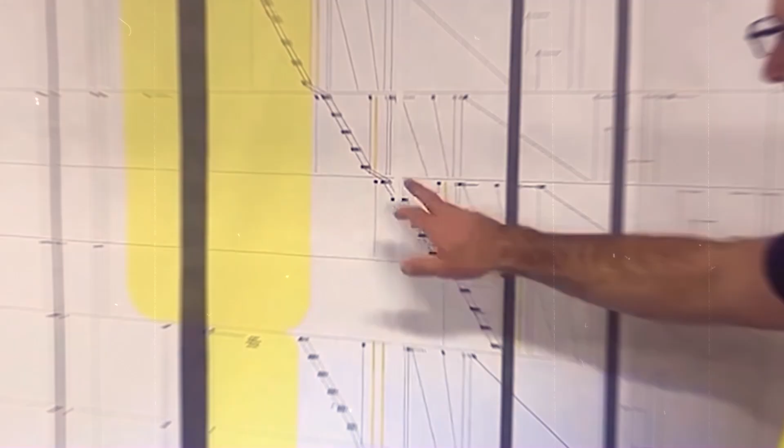Okay, trade partners, I want to just welcome everybody out to our pull plan. If you do a pull plan with other people, you'll see that the way I do it is different. I found this to be very, very effective.

I want you to know that my focus is to protect trade partners. Most contractors don't understand that you cannot beat up trade partners, bully them, force them, push them around, have them losing money, ask them to be all over hell all at once, and still make money. You cannot do that and still finish your project on time, because the project might be the most important thing financially, but that project isn't going anywhere unless the trade partners are flowing and making money.

So I want you to know that these pull plans, the way I do them, are 100% focused on how do we get trade flow and make sure that everyone is taken care of. So this board right here is pre-formatted. We have sticky colors all ready to go. Over here to the left, I've got a little conditions of satisfaction section, and we're going to go over that in a second and ask, what do we need to accomplish as a part of this pull plan?

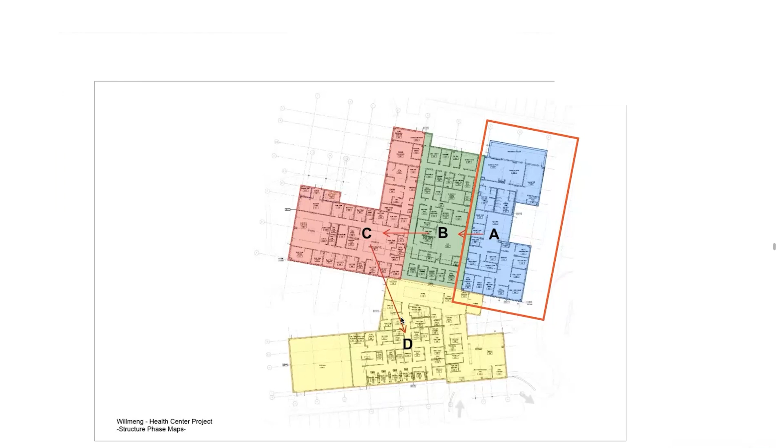We're going to go through our rules, meaning how we want to run the pull plan, or the team does. I loosely say I, but the team already has a proposed zoning strategy that we're going to discuss here in just a minute. And we have our pull plan area. And what's different from what you may have done with other contractors is that this one has different zones.

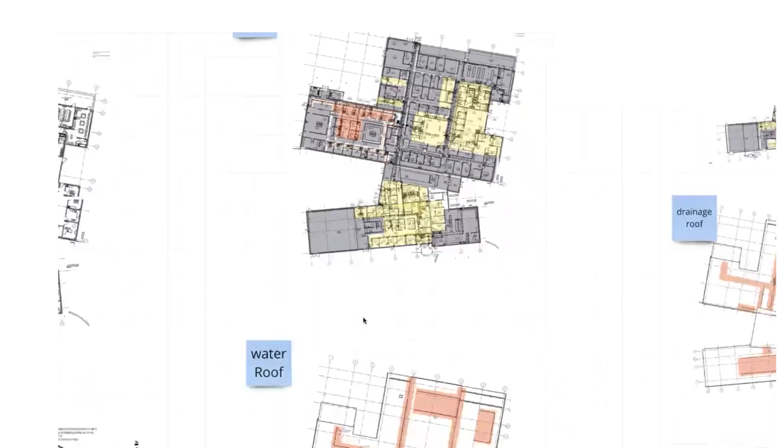The only other thing that we've started doing with Matt's expertise, Matt and Tracy, is that we have already looked at the work density of each of these areas. So HVAC, piping, the HVAC on the roof, electrical. And so we generally know where things are. And that was taken into consideration when we proposed the zoning, but we can definitely adjust that while we're here.

We are going to run it forward. So that means that we are going to only ask you here in a minute, hey, what is your duration and what are your activities? Okay. And then when we go back, we're going to ask you, hey, for you to do that activity, what things do you need? So this is a pull plan where we'll go forward and then we'll run it back to confirm the sequence.

The last planner system means that you all are the last people in the planning cycle, and I would say the most important. What that means is we are not screwing anybody into a schedule that they didn't agree to. We are asking you all along the way. So let's get started. Conditions of satisfaction. This is the first thing we do in a pull plan.

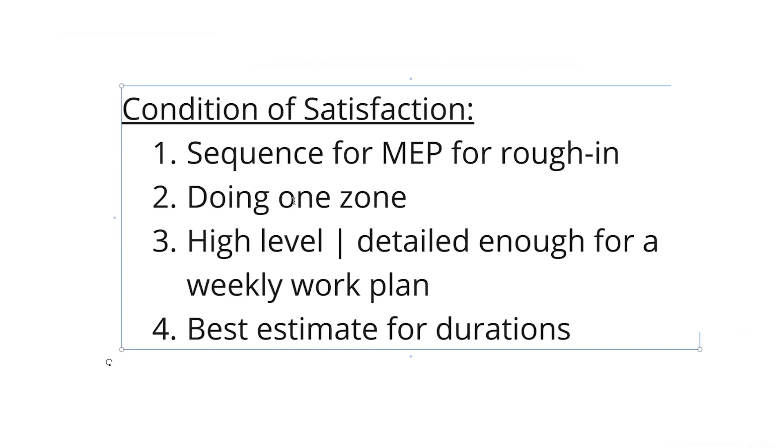So this outlines what are we doing. So what we're about to do is we're going to create a sequence for MEP. Well, all we're doing in this pull plan is we're going to complete the sequence for MEP for rough-in. So this won't be finishes, devices, terminations, things like that, right? We are going to do one zone, but you're only going to give us durations for one zone.

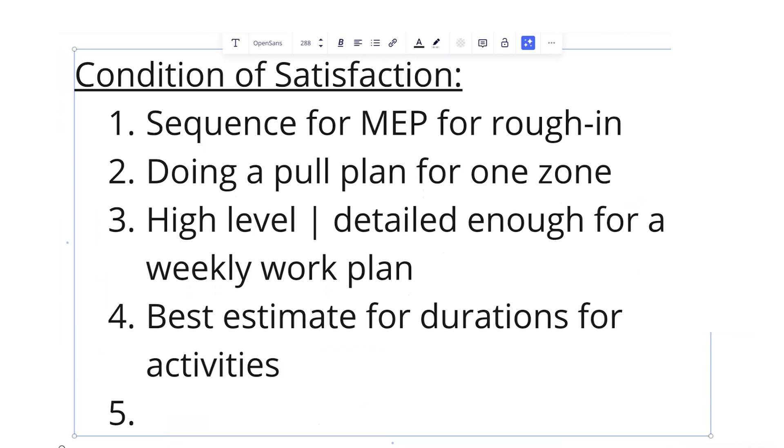This is going to be fairly high level, but it needs to be detailed enough for a weekly work plan. And what we need is your best estimate for your durations for activities. And the last thing that I would probably say before I ask for feedback is please ask for what you need. These are the rules. We're going to decide on zoning first. So I'm about to ask everybody, hey, does that zoning generally work for you?

Then we're going to fill out our activities and we're going to do it in a forward pass. And then we're going to run the backwards pass and we're going to focus on needs, meaning we're going to make sure that every activity has needs met. These really work well if we have one person speaking at a time. Only commit to realistic durations. Do not feel forced into durations that aren't realistic, please. And then the other thing is, please, no sandbagging.

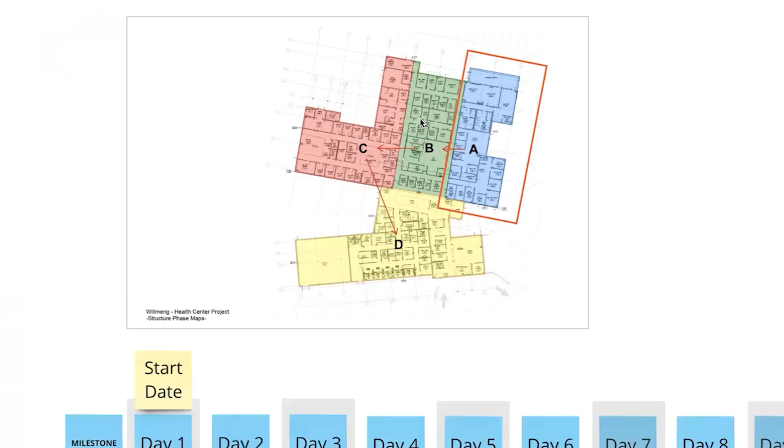All right, first thing we're going to talk about is zoning. We actually researched the drawings and looked at the density of your work in all of these areas and ran the information through the calculator.

We have a calculator that simulates how many zones would be ideal. And this is our first pass. So here's my question as I show this to you. The foundations will have gone in this direction, okay? And the structure generally in that same direction. And then when we do the exterior, to my knowledge, the exterior is going to run around the building in this direction as well. So we kind of have a common direction. So this would be our first zone, second zone, third zone, fourth zone.

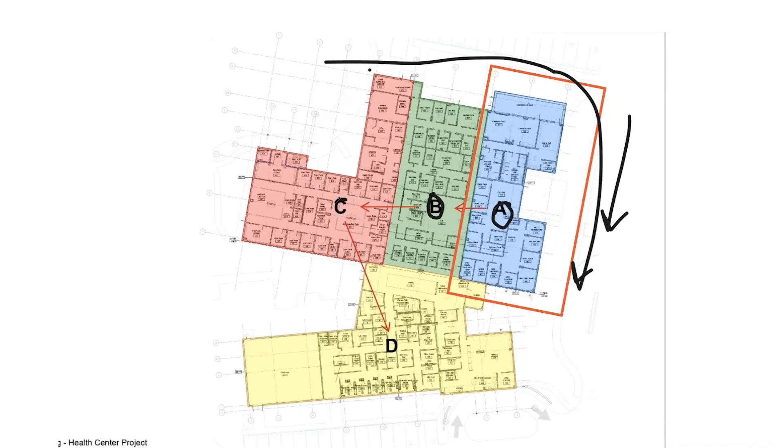So trade partners, is this correct that this is the general location of our med gas, really in zone 3 and 4? Is that the way you all understand it as well? Yes. This is actually good for us and ties into the strategy because you all can start on zone 1 and 2 and release these to successor contractors. And once you do this, if it takes a minute for us to do the inspection and button up the drywall, this will be at the tail end of that. So hopefully that works out really well.

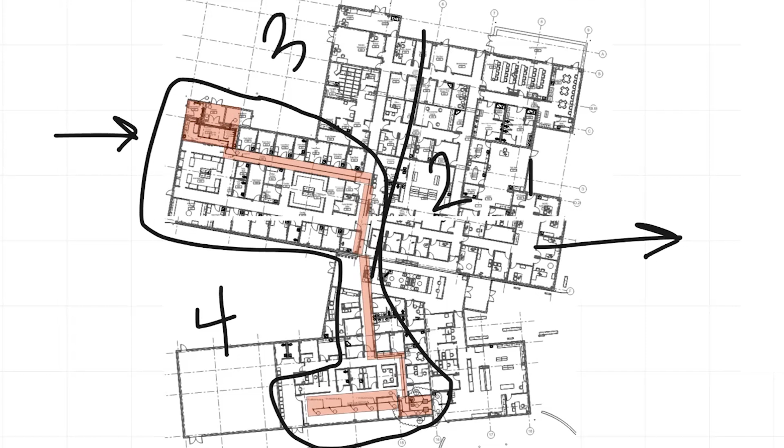So once you ask the interior rough-in folks to arrive, what can you expect to be done before they get there? Steel decking is before these guys start. Okay, framing, interior framing, exterior framing. Yeah, decking. So decking first, exterior framing, interior framing. So slab on grade will be complete, your steel decking and your exterior framing. Exterior framing, I'm not going to say that that's done. That's going to run concurrently, but you will have slab on grade complete and steel decking. What is the first thing that goes on in this sequence? We're going to go mechanical. Okay. Oh, we did this last time and it was really jamming.

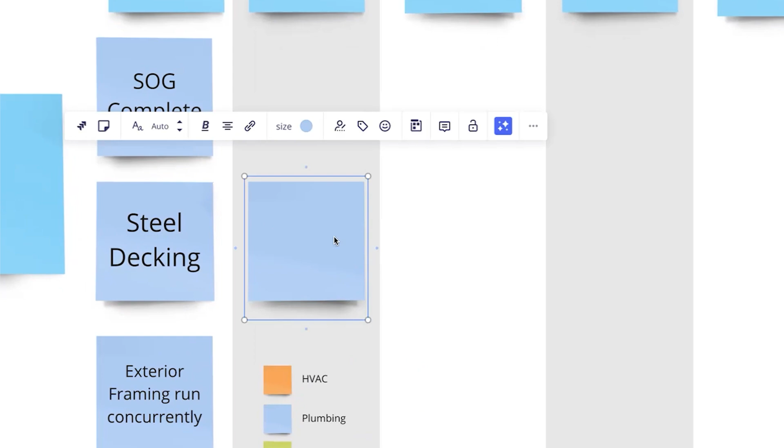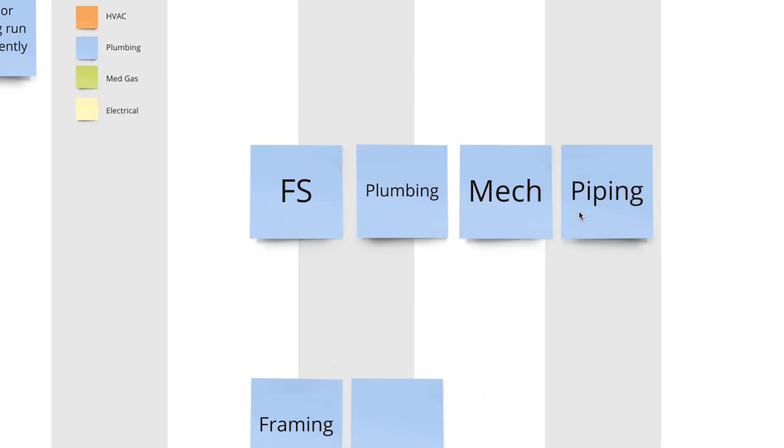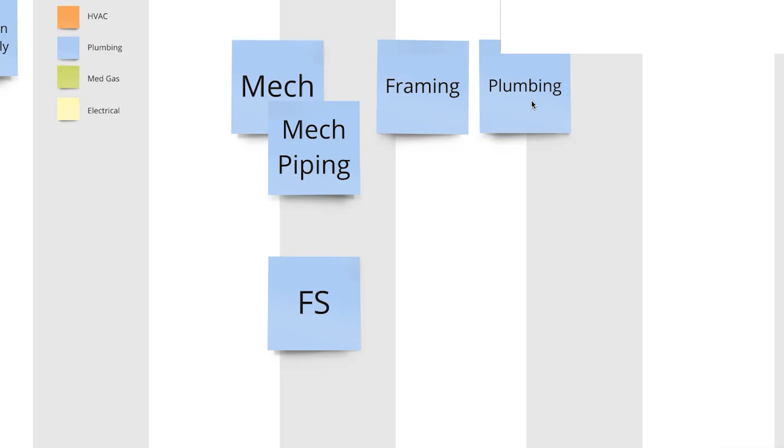What is the general flow of the interiors? I want to ask fire sprinkler, mechanical, piping, plumbing, framing. Let's start with that right there. What is the general sequence we want to go with, Matt? And then that'll give me an anchor. Where is fire sprinkler in relation to mechanical piping and plumbing, do you think? Fire sprinkler's up in the air right now. We're gonna go with mechanical first. I'll put fire sprinkler here. So mechanical piping, mechanicals concurrent. So where do you want plumbing, Matt? So that's gonna be right there, right after mechanical piping.

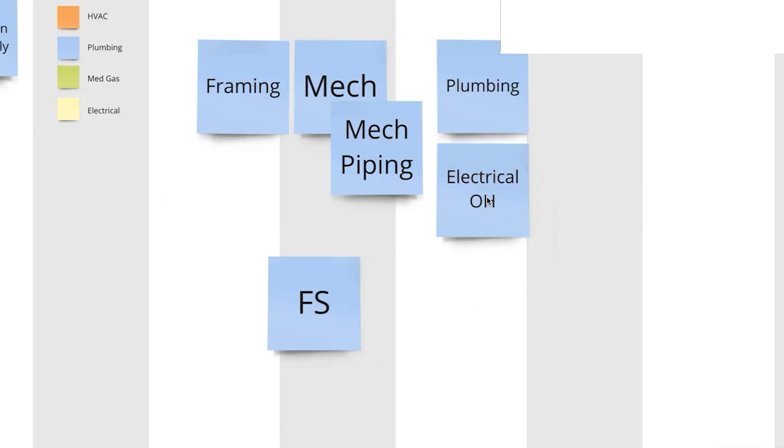Okay, wonderful. So frame's gonna be first. Okay, we're not just doing priority walls, we're doing everything. Okay, perfect. All right, what about fire sprinkler, overhead electrical? Where do you want them? Yeah, mechanical, plumbing, electrical. So it's just gonna flow that way. Okay, perfect. All right, fire sprinkler. Yep, they're gonna have to stay at the end for now. Let's switch plumbing to dark green, and then we'll do light blue for framing.

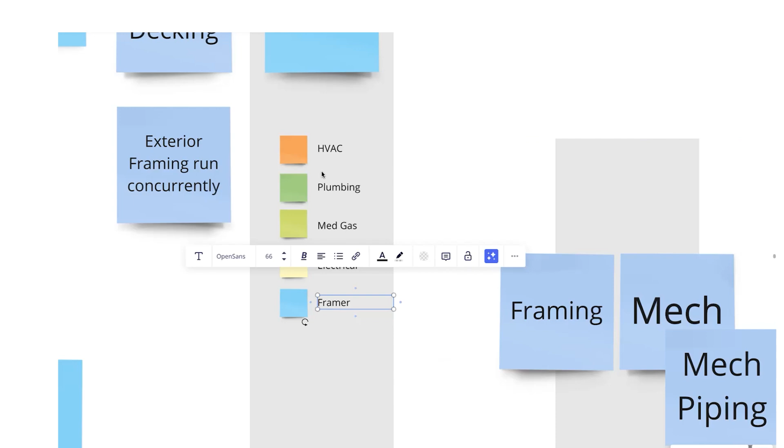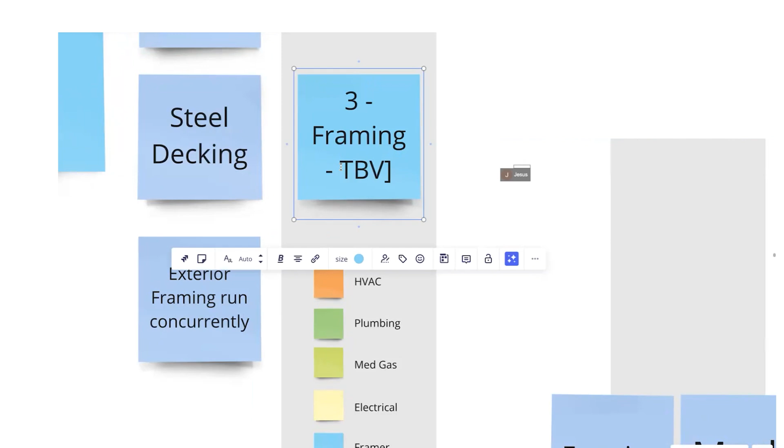Is the framer there in the room? No. What's the duration for framing all the walls inside one area? Well, I think they give us 10 days for the whole building. So what's 10 divided by 4? So it's 3 days. Okay, framing. All right, so we'll go ahead and have that run out 3. And this is what I'm going to do. I'm going to say to be verified. If there's a trade partner that can't be here, we're not going to shove a schedule duration down their throat. All right, the mechanical contractor, let's go. Once the framing's up, what is the next activity that you have?

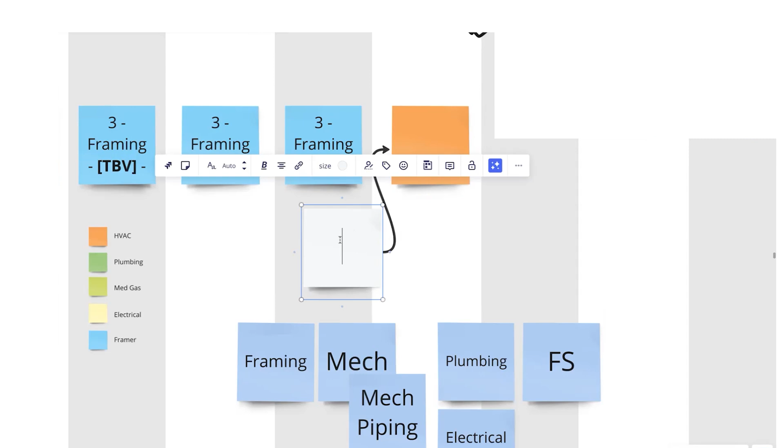Let's roll. So curbs being on the roof, I won't worry too much because we're more interior at this point. So the curbs will be set already anyway. So I can put an activity here that says that we need to have something done. Our roof, so not just decking, but our TPO has to be done too. So we can start our in-wall before they start their overhead duct. Once our rough framing is done or halfway done, we can bring our electricians and plumbers in to do our in-wall, and then we can't do our overhead mechanical until our TPO is complete.

We could start running piping. Which, that would be cool. Piping can start running because if it gets wet, that's okay. This is just our duct that can't get wet. It's just none of our duct can get wet.

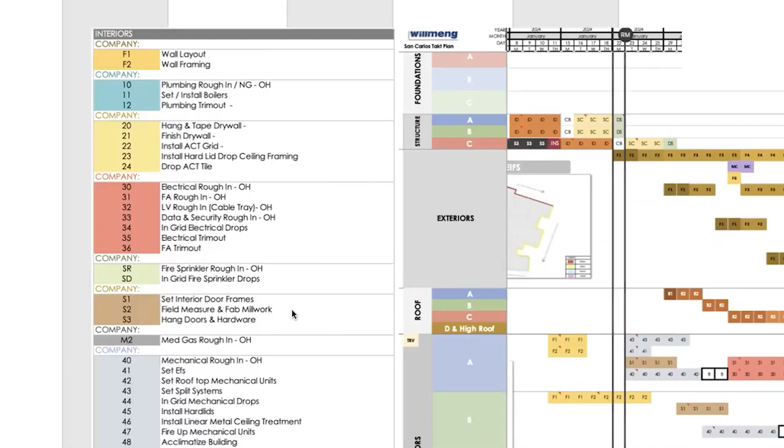One thing that I would like to do is let's create the ideal sequence, and then what Danny and I will do is immediately compare it to the other schedule. In fact, which activity right here is the roofing? So R2 on area A, so that's when it's happening, and then the high roof, and then we start activity 43 and 41. So mechanical starts right here, typically in each one of these areas.

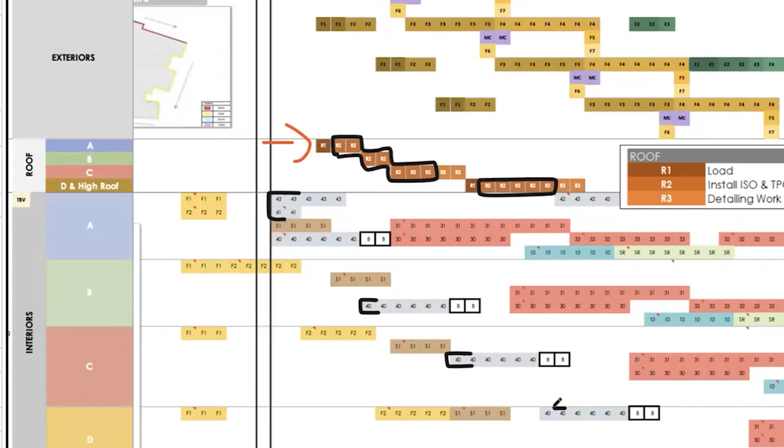And so what we have is a problem where this tie for being substantially dried in is not done by this time. Okay, so that's a problem. Do you think we're going to start later, or do you think we will adjust the sequence to do overhead after in-walls? Which one are you leaning towards? I'd go with option A there, Van. Adjust the sequence? Yes, absolutely.

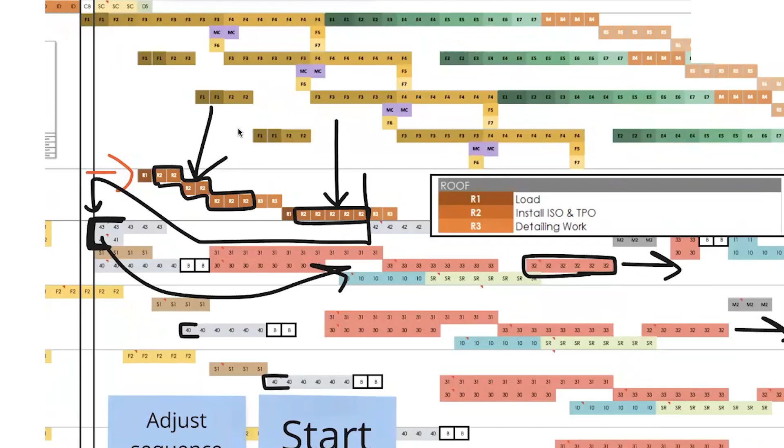Okay, perfect. All right, so we're going with the assumption that we're going to start with in-wall first, and anything that needs to be in dry conditions, we'll move as late as possible. So mechanical, knowing that information, what is your next activity? Mechanical piping's first, plumbing and electrical. Okay, how many days for mechanical piping? 8 days. All right, what happens after mechanical piping? There's going to be that overlap of plumbing happening too, right? Plumbing. Sorry, we're just sticking with just mechanical. We're going to do a mechanical pull first.

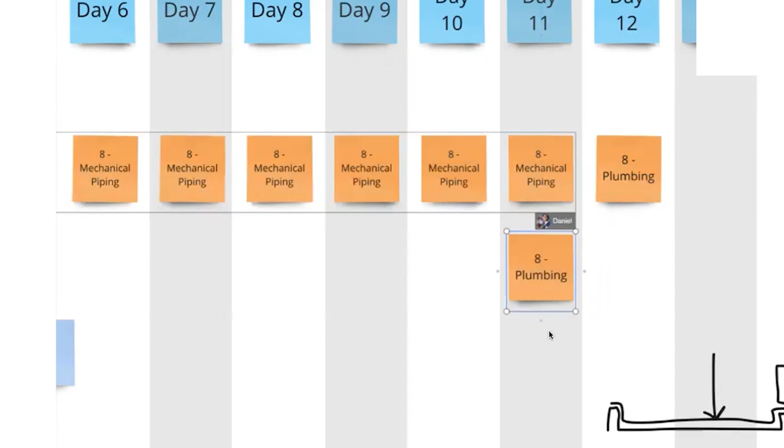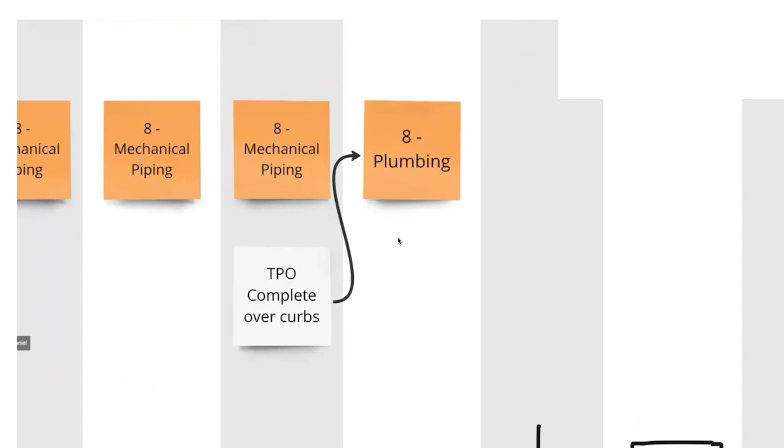All we have to do here is to write down what part of the sequence it has to be done. So here's what our promise is. We're not going to schedule something and make you do something that's not right. So all we have to do in the sequence as part of the pull plan right now is just say, okay, mechanical piping can go in, framing and mechanical piping can happen, and then for you to start whatever else you want to start, you have to have your TPO complete on roof and over any curbs.

Is that fair? Yeah. And I can also move this somewhere back here, and it's on Matt and the rest of us to make sure that the overall schedule reflects that you need this ahead, so not a big deal. So for your plumbing, how many days does your plumbing install take? I'm assuming that's overhead and in-wall. That's also 8 days. 8 days. What day can this start in relation to the mechanical piping? I would say after 4 days, I would bring them into the second week. So there you go. We'll start our in-wall about a week after mechanical piping.

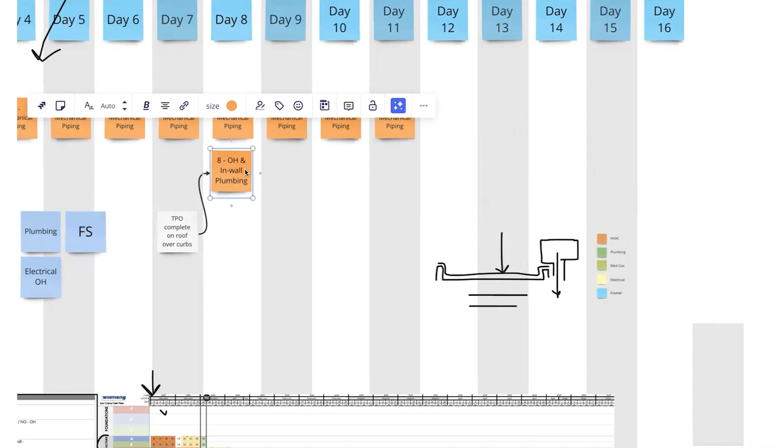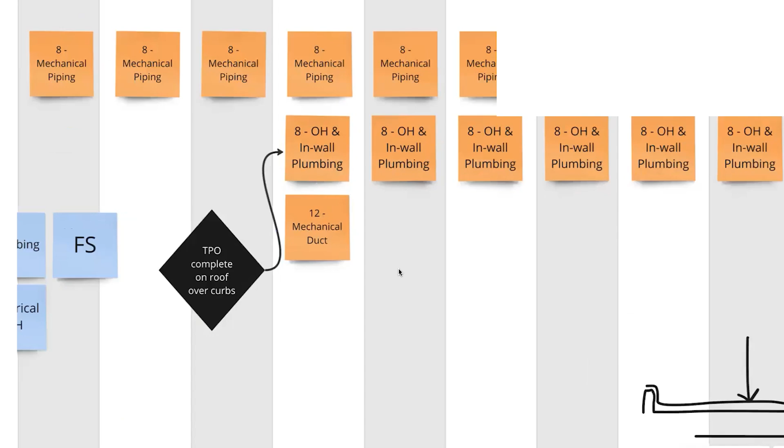All right, so let's go ahead and run that out. 8 days is TPO complete. Right here, this is our key indicating that milestone. So you tell me, based on that milestone, when does your mechanical go in? Mechanical duct starts that day. How many days for mechanical ducts? So for now, 12 days. And does this run concurrent with in-wall plumbing? Or if you have mechanical piping, does this all work together?

So you have 8 days of mechanical piping right here. You have folks in that same zone. The in-wall plumbing is happening and duct. Do you all fit in that one zone? This is a 4,000 square foot zone. So just be thinking, can all of those fit in this day? Well, why don't we start then the 13th? Give him 4 days to get started. That way he's moving, that way we're falling back on the duct. Does that make sense? Yeah. That way you're moving out of that area while we're coming back and starting.

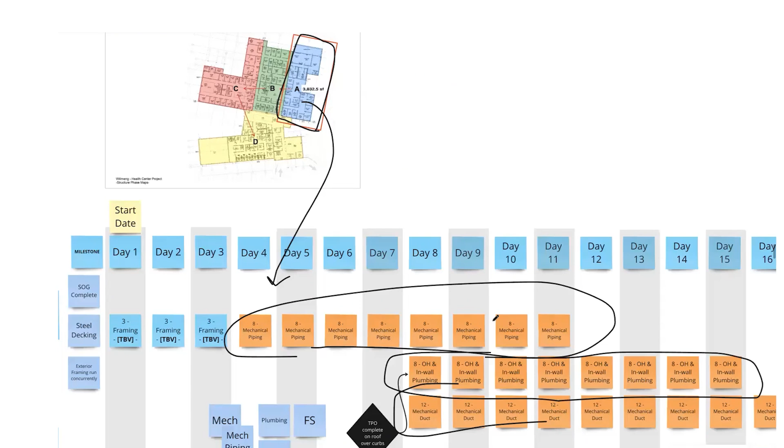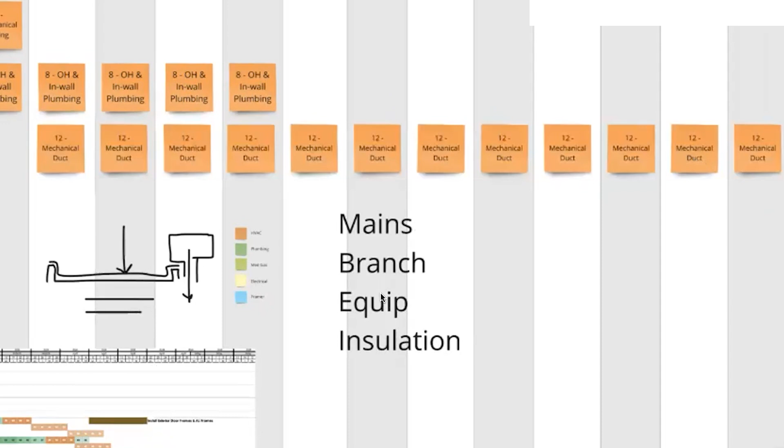Okay, so for this mechanical duct, it's important for us to distinguish mains, branch, equipment, insulation. Is this all installed duct, or can I break them up into the different phases to make sure you have good flow? It's all going to be the same, basically. Run the branches as they run the mains. All right, perfect. Then we have plumbing.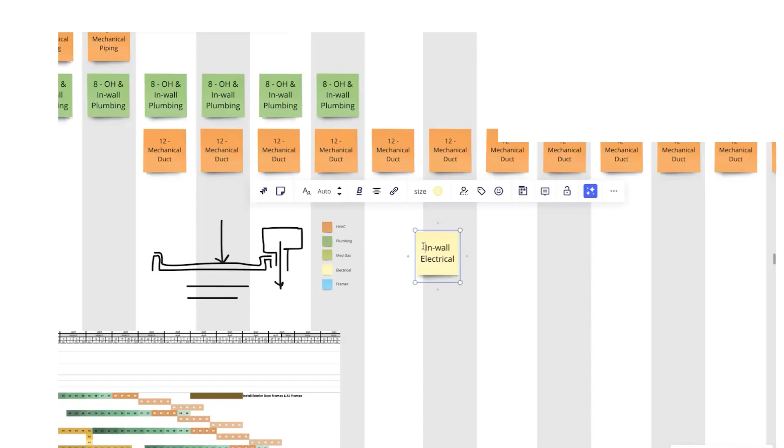What about electrical? How many days for the overhead electrical just for that one 4,000 square foot zone? Go with the same thing, 8 days. How many days for in-wall electrical, 4,000 square foot zone? 7 days. Okay, and in-wall electrical. So where do you want fire sprinkler in this system? I think we used 8 too many times, so we're not 8. So they can start at the same time as the overhead duct.

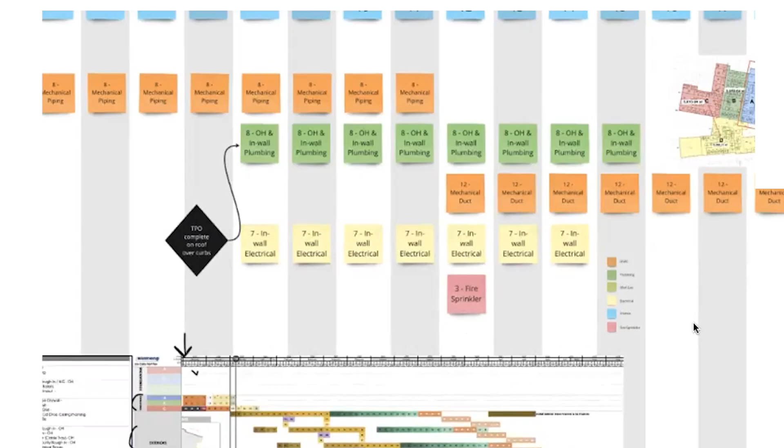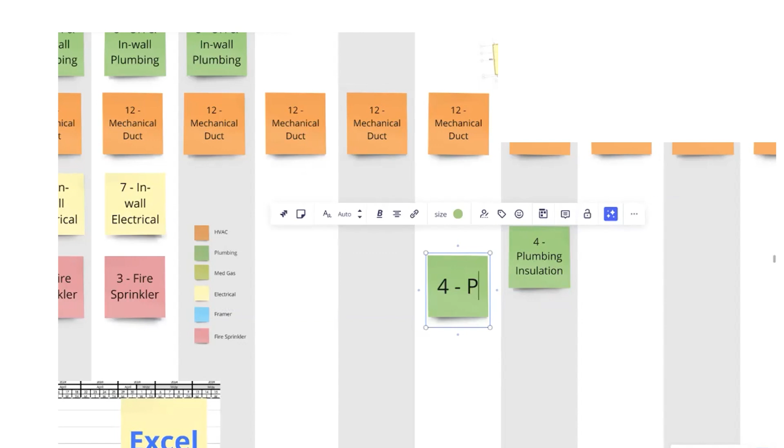All right, we can analyze this real quick. How many days will it take you to do your plumbing insulation? A week per zone. This is plumbing insulation. Okay, so that takes 4 days. And what you're saying is that you need to be able to test the entire system unless you valve it differently. Yes. We would prefer to test the whole system and then come back and insulate also.

We're going to see if we can pull this all together here in just a second. All right, so we'll place these here in just a minute. Let's just make sure that we do a quick audit here. Real quick, typically you do your med gas, zone valve. It's been a while since I've actually done work. And then testing and inspection.

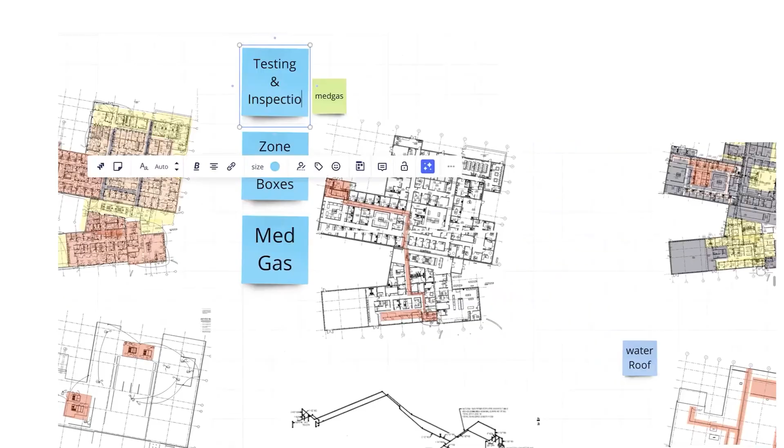Give me the durations for the med gas, if that's okay. The piping to the zone valve boxes will take, the whole thing will take 5 days, and then the testing and inspection will take 2 days if we can get the inspector out right away, which we should be able to. 5 days for top out. Oh, for top out from start to finish, testing and everything?

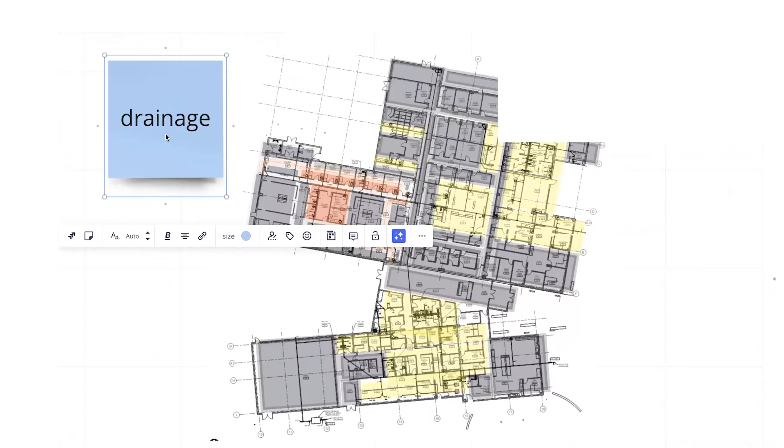Real quick, do we have all of our storm drain figured into the sequence that we just went through? Is that included in the overhead plumbing, the storm drain? No, we would have to look at it here real quick. So is the roof pitching to downspouts, or do we have any interior drains that run overhead? That's my question. It's gutter and rain chain.

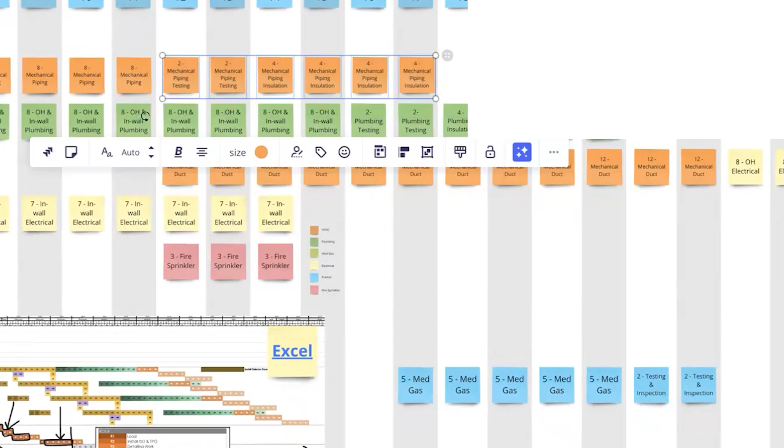Let's say that the testing and insulation wasn't a problem. You would probably do the plumbing right after the other activities. Is that right? If you were able to do it, this is how you would do it, right? The insulation, yes. I'm looking at the patterns here.

Here's my question. You have zone A and zone B. This sequence that we just did is just for one zone. And so if I was to copy this down for zone B, there's a couple different strategies we have, and how we do this is very, very important. If we do a 4-day stagger, that means framing would go through and have a buffer and then head to the second zone and start jamming, and then have a buffer and then go down and jam.

What it would mean for the rest of you if we were on a 4-day stagger is that mechanical piping would go for a week, and then you would have to basically be in 2 zones at one time because your floors would be on a 4-day stagger. Then you would be expected to be finishing, and then 4 days later finish another zone, and then 4 days later finish another zone. The other option is, instead of a 4-day stagger, which I just want everybody to know is typically the stagger, the other option would be to do it on an 8-day stagger like this.

And what would happen here is your framers could actually probably just go frame the whole darn thing, and they would be on their own rhythm, so not a big deal. But with the rest of you, mechanical piping, and then you would go to a different zone and then do your mechanical piping. And same thing with in-wall plumbing, you would go do your stuff and then move to another zone. So it would be definitely a finish to start. What's everybody thinking for the stagger for going to zone? Is it a 4-day stagger or an 8-day stagger?

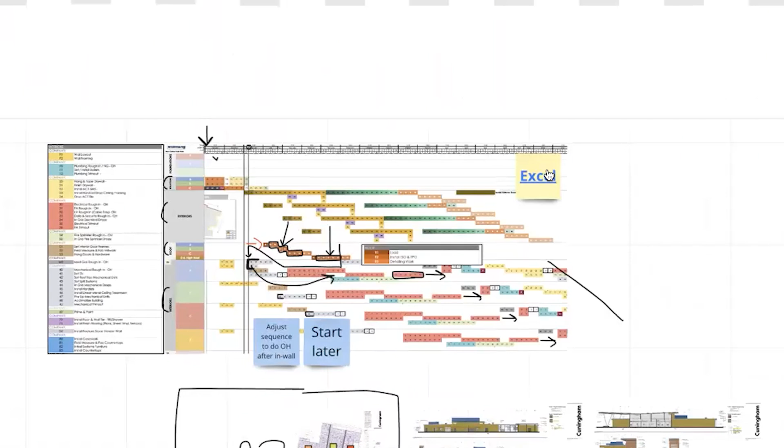8 days. I'm going to check something real quick. If 31 finishes and then we go 8 days more, so 31 plus 8 is 39, plus 8, I think if we kept doing this through all 4 zones, this would end up taking 55 days. So I just want to come down here and check the actual schedule and see if we have 55 days in the schedule and if the overall sequence looks like it will work.

So 20 right here, this is when we need to start doing our drywall. And so I want to see how many days we have going to the left. Okay, so I need 31 days to the left. The sequence that they just gave us, Matt, is actually golden. So activity number 20 here is the start of drywall.

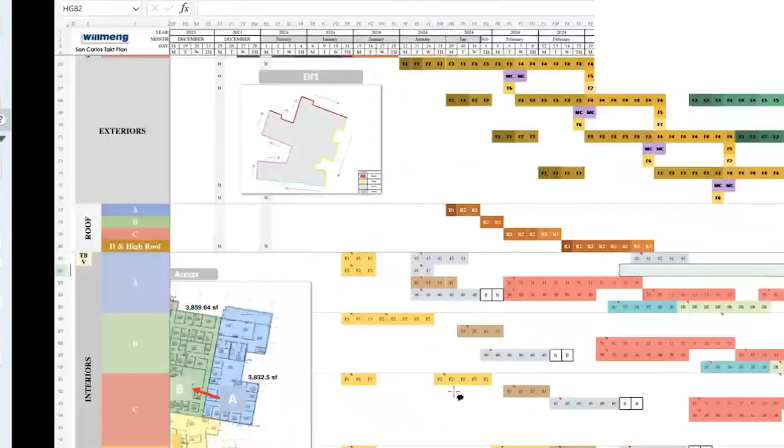And then over here, R2 is TPO. And that's even for the high roof. That means everything's done. And what I'm saying, though, if you go to our whole plan here, this is what everybody just coordinated here, which is fairly tight, is 31 days. What I'm telling you is that with the 31 days, and you take 31 days back, this is when you would have to start interior framing.

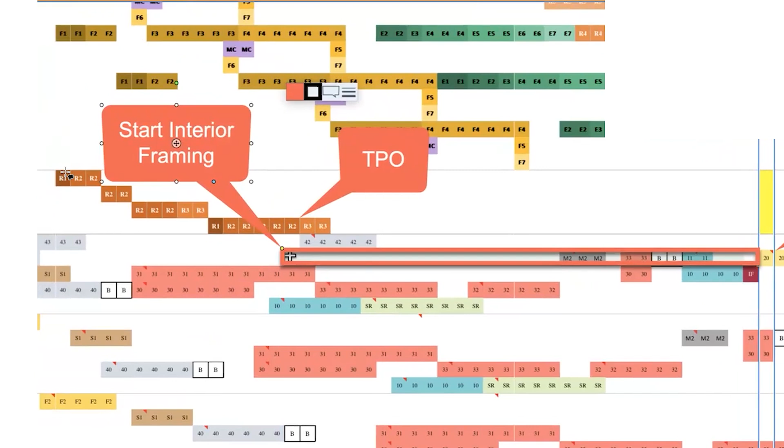You can do a couple of things here. You can wait until the roofing is done to start so that people don't have to do that out-of-sequence stuff and start it later. Or you can start people earlier and gain buffers at the end of the sequence, or you can release a little bit of the tension in the sequence and have a little bit more room to breathe. The 31 days at an 8-day stagger 100% fits inside the overall schedule and still completes the ending. That's a real good sign.

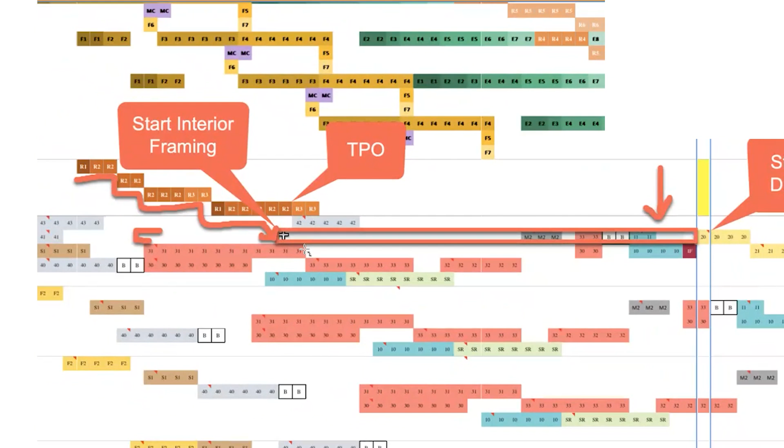Does that make sense, Matt? Yeah, but that's starting the interior framing when? Can you zoom in or out or down? I'm saying that you could start the interior framing after you're substantially dried in. You could start it as late as, which I'm not saying I definitely recommend, but you could start it as late as February 22nd and still make it.

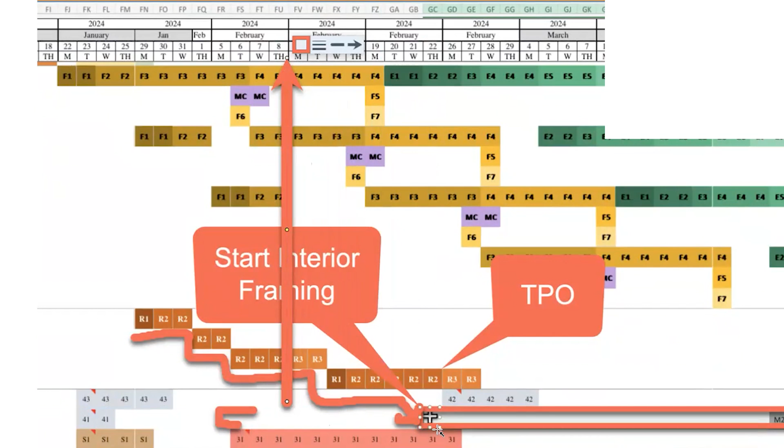Now, what I would probably do is get the roofing done in areas A, B, C and start framing. And so that means you would start on February 12th. And then while the roofers are still on the high roof, get your sequences started. And that would give you probably 6-7 days of buffer at the end. So I'll start my framing when steel deck is done on A, B, and C. So at the end of January 29th is when we're going to start our interior framing. Okay, well, the bottom line here, team, is that this fits in the overall schedule and it's looking really good.

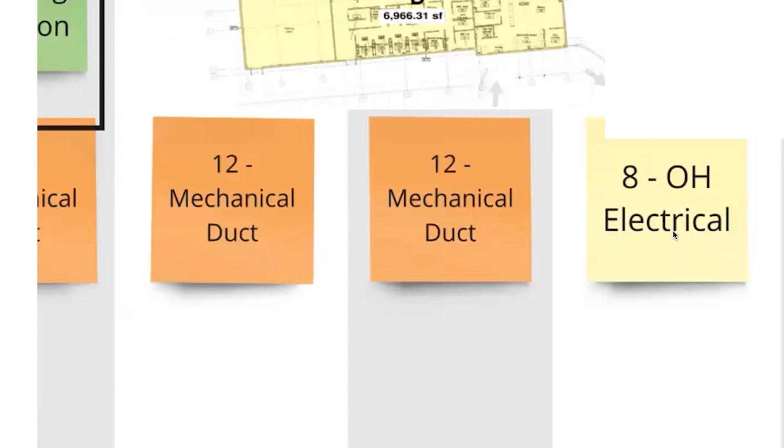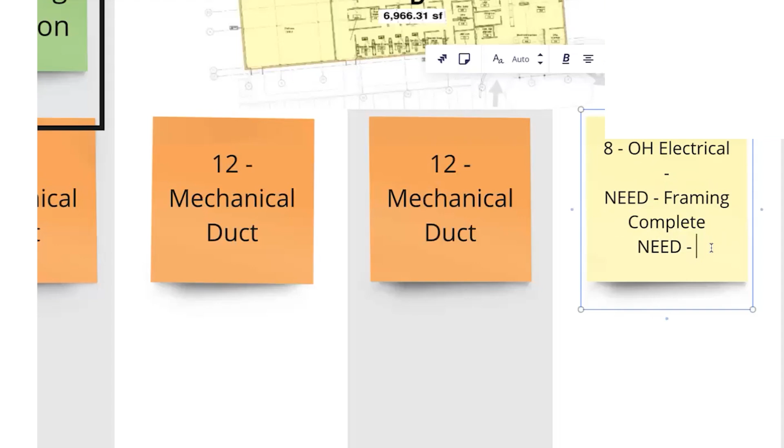So overhead electrical, I need each contractor, when I call your name, to tell me what are 2 things you definitely gotta have for you to do your job. This is where you ask for what you need. So for overhead electrical, it's after the framing's done. Okay, so framing complete. The mechanical guy needs to be through with his big duct work, and the plumber with his big stuff. And when we do this, we need to make sure that you have everything. So framing complete, that is a yes. So I'll just mark a yes here at the beginning.

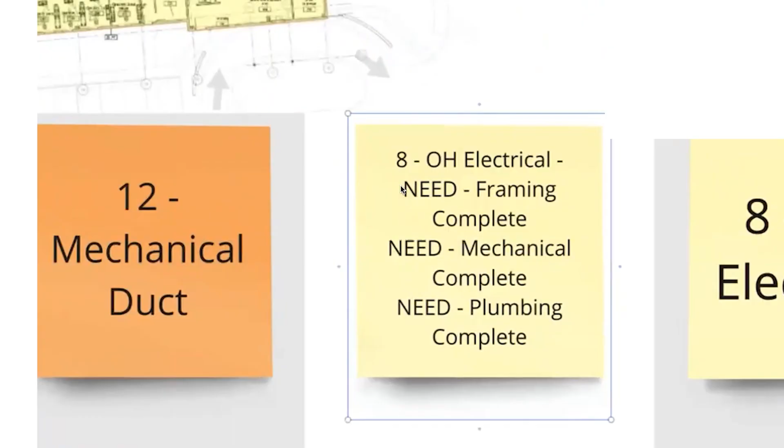Mechanical complete, mechanical contractor, at the end of your 12 days, you're going to be out of his way? Yeah. Should be. Yes. And then plumbing complete, that's correct. At the end of your electrical, do you have an inspection or is that just a part of yours? That's just conduit rough-in. All right, 10-4.

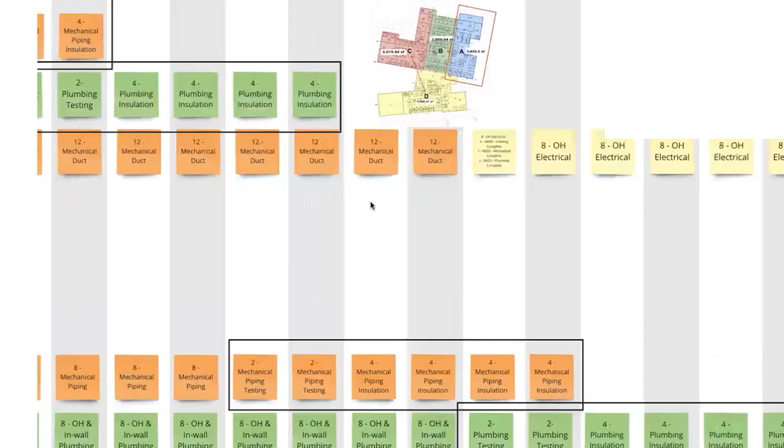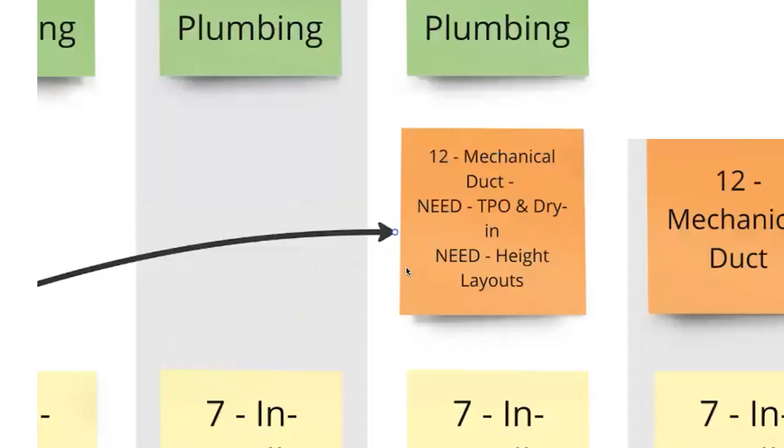Mechanical duct, you've got 12 days. Give me at least 2 needs. Dried in. Your TPO needs to be done. We need height layouts for everybody as well. Okay, so TPO needs to run over here, so I did that, so that's a yes. So one of the things that you'll have to do is BIM coordination complete will have to be a predecessor over here. Okay, totally fine. That's a yes. All right, that's mechanical duct.

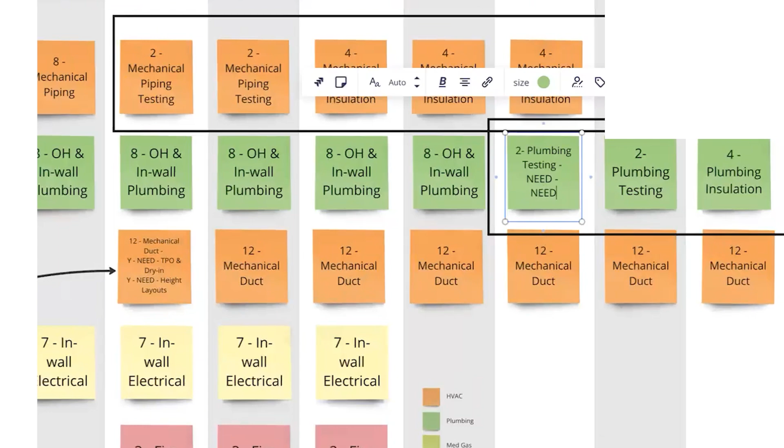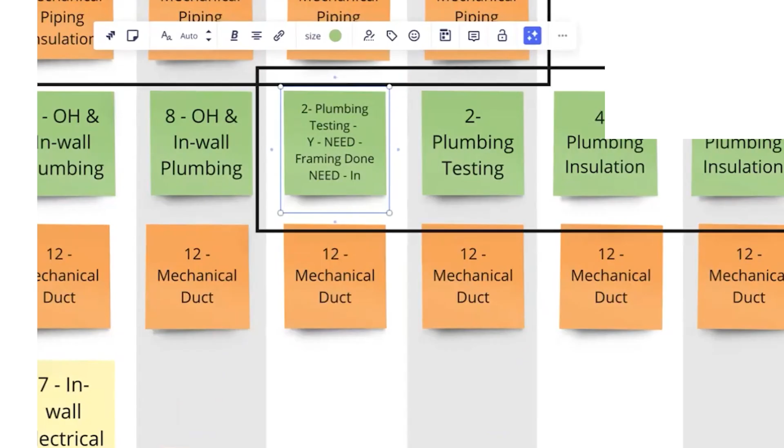Plumbing testing, what do you need in order for you to be able to do your plumbing testing? We need the same thing that electrical needs. We need the framing done and we need HVAC out of the way. If you need the duct guy out of the way, just remember duct goes all the way over there, and so if you need that done, then that's definitely a problem. We'll work with them. We'll work side by side with them. Okay, all right. So I would say entire in-wall complete.

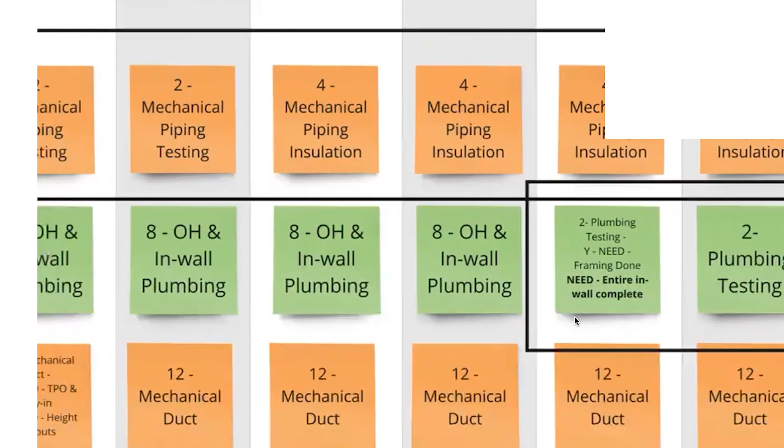In-wall plumbing, what are the 2 things you need? Just framing. Okay, framing, anything else? Framing you will have done, so that's done. Okay, we're almost done here with this portion of it. Okay, mechanical piping testing, what are the 2 things you need? Roof dried in, obviously. And then mechanical piping testing, what else? Mechanical piping install, right?

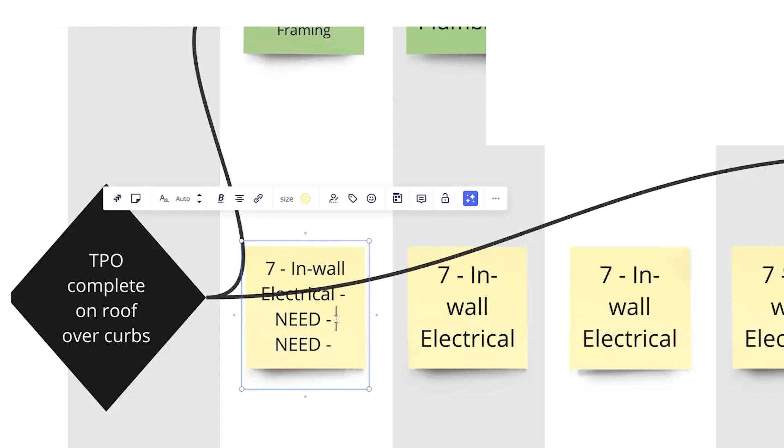Okay, pipe, duct pipe. Okay, we got two more: in-wall electrical. What do you need in order for you to do your in-wall electrical? Only if I'm in the same cell as the plumber would I need anything. Otherwise, I'm good as soon as it's free. Okay, framing complete. And then you would just need space.

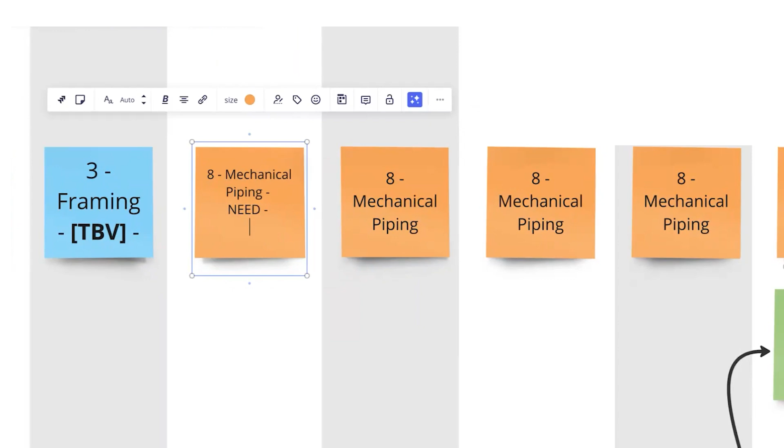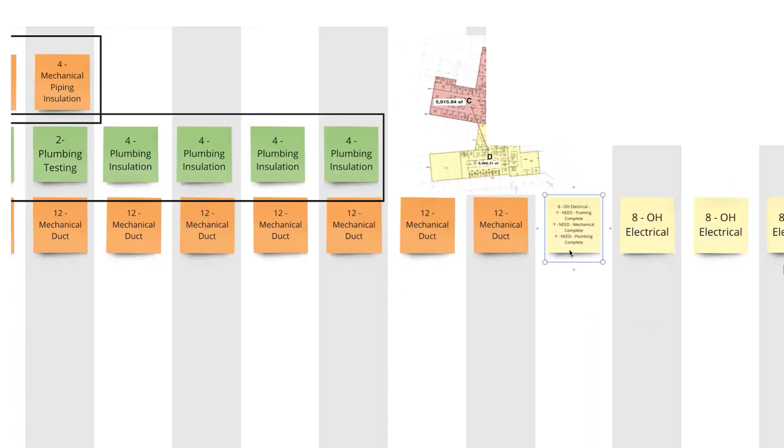If you do a full plan, you can either do it backwards to start and then run it forward, or you can run it forward and go backwards. The framing has its own pace. The rest of the job has its own pace. If you all want to get all 4 areas done and ready to go, and then test all the mechanical piping and all the plumbing all at once, that's what it would look like on the schedule. You all are telling me that's your preference.

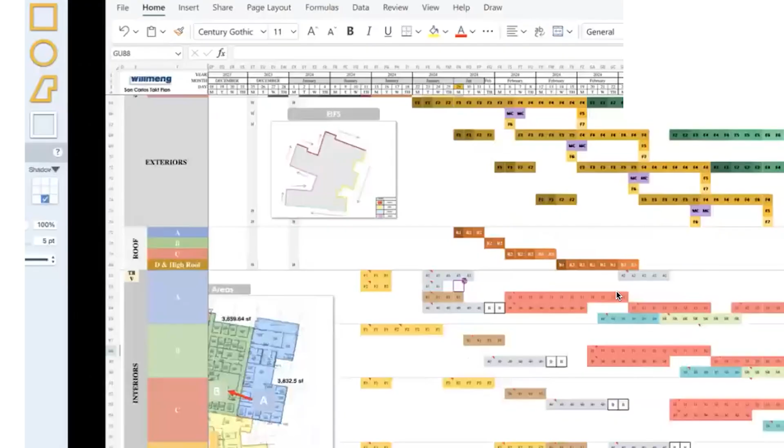My question is, is testing and insulation of plumbing and testing and insulation of mechanical piping a total of 6 days for the entire building? Or is it longer than that? It's definitely gonna take longer. For insulation. Okay, so quite a bit. What you all are telling me is if you have 4 days of insulation, it's probably something like this. Framing has its own pace, the rest of the job has its own pace, and then this is the pace at which you would insulate. Does that look right? 4 days per section to insulate?

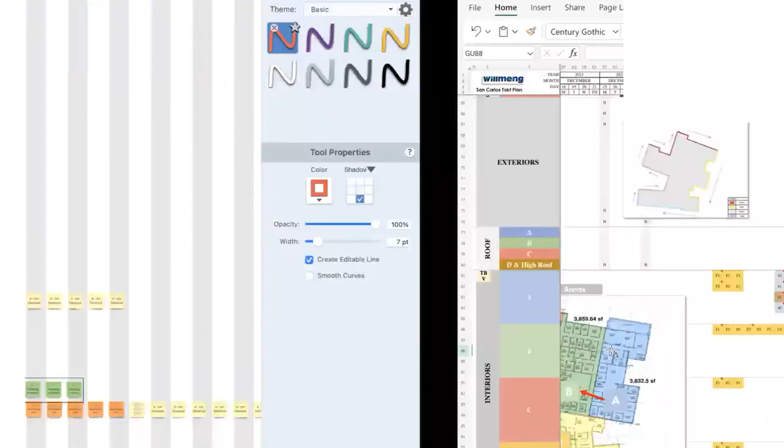Yes. So the only thing that I want to check, let's look at the overall schedule again. Drywall starts on, that would actually work. This actually works, guys. So we would have to do this right here. You would have to be done with your installation by day number 31. And then what Danny's going to do is put a diamond here that says that's when drywall starts. And then the other thing that I want to check is that you want to have all mechanical piping installed before you do the testing.

What you could do, guys, is you could do mechanical piping for 2 zones and just valve it off and do your testing halfway through. And then you would be able to do your mechanical piping in your 4th zone. So you would basically have to split it up into 2 areas. Let's look at the actual plumbing install. Same thing with plumbing. You could get done with 2 zones and then you could do your insulation. And then at the end of your plumbing, right here.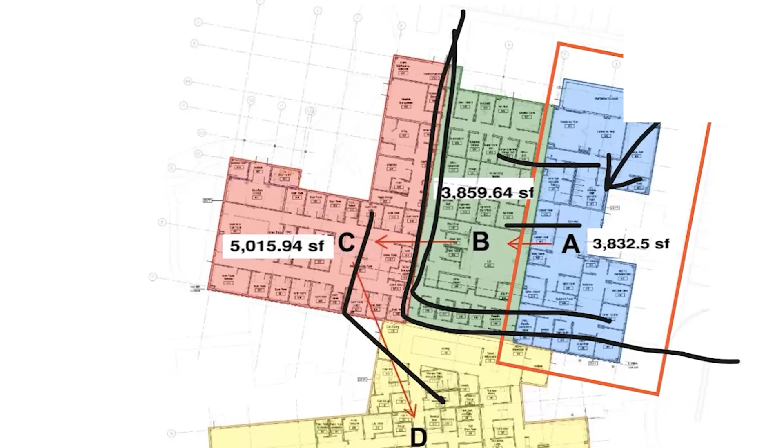So here's what I'm saying, guys. When it comes to your testing, what the schedule is showing is that you're going to have to test every 2 zones to meet this schedule. So if you have overhead mechanical piping and plumbing, or hydronic piping, you're going to have to valve it off, test zone AB to kick off drywall, and then do this with CD to kick off drywall. Is that okay with you all, or is that a deal breaker? We can do it. You can do it? Okay, perfect. If we do it that way, then that fits in the schedule.

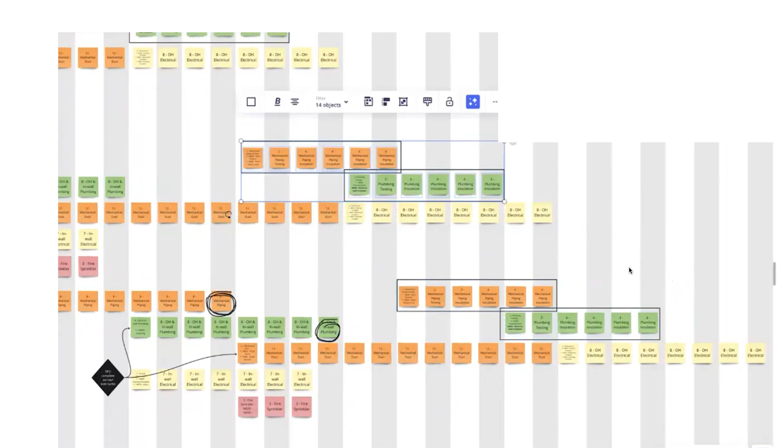The only thing that we might need to do here to better set up your schedule is that I think your insulation is going to have to move back. In order for you to be properly set up, your insulation here would have to be exactly right there. So from a flow perspective, going from zone to zone to zone, the framer every 3 days hits into different areas. And Danny, I want you to make sure that the framing will be released from the structure and the decking in order to maintain that flow. Can you make that note? Okay, what it means for the rest of you is you can come do your mechanical piping 8 days and then just go into your second area.

For in-wall plumbing, that means you can go and then you flow right into your second area. For in-wall electrical, it means that you're going to go for 7 days, have 1 day of buffer, and then go to your second area. For fire sprinkler, if they don't go first, then they're either going to have to keep your rhythm and be here for 3 days, then have a break, then be here for 3 days, or they're going to have to come in all at once later. But we can simulate that. And then for your overhead electrical, you will go 8 days and then 8 days. So it looks like your 8-day rhythm worked out.

The only other thing that you'll have is you will start your mechanical testing after you're done in your first 2 zones on day 22. You will start your plumbing testing after both zones are done and installed on day 26. And then that will flow nicely down here. What'll happen is when you go from zone 2 to zone 3, there will be 2 days of gap if that's okay. And if that works, then you'll be able to do your testing on zones 3 and 4. And the same thing with plumbing, you do your plumbing and then you have 2 days of buffer before you do zones 3 and 4. And then you basically flow and you flow.

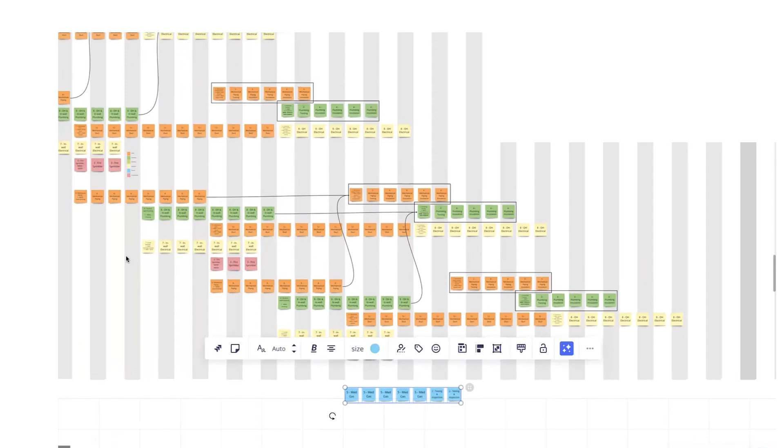And then let's pull in med gas. This is just a total of 6 days. Looking at the overall schedule here, you're going to want to start your framing right here for zone number 3. So we've got to fit med gas before that for these 2 zones. We just need to find a place to put med gas in here somewhere before this milestone. Or are you going to try and do that on the weekends as you go? Because actually you could be doing, as long as overhead and electrical is fine, you could literally... Where the framers are finishing on zone C, that's when we're going to be dropping the med gas.

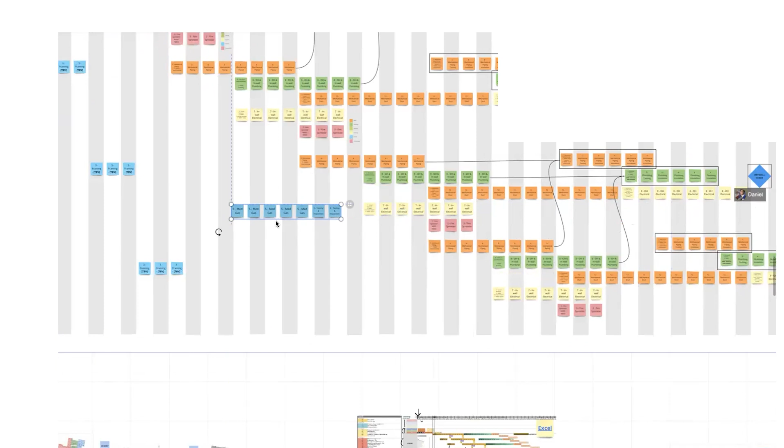Who came up with that? We need to pay them more money.

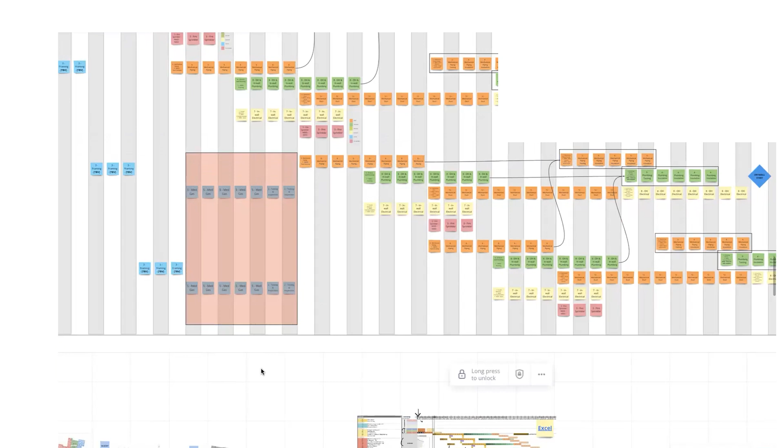Plumber. Holy shit. That's a damn good idea, because what that means is for these 2 areas, as long as they're at the right area and they're not blocking ducts and stuff, the framing will be done ahead. Then you got med gas in both zones, as long as they have the right hangers, and then they're in before everybody else. That's a freaking brilliant idea. We'll work that with our mechanical guys too at the same time to make sure that does in fact work too, coordination wise.

Hey, we're closing this out, team. This is all going to be looped into the schedule. But what we found is framing's on a 3-day stagger as long as that's confirmed. All we got to do is make sure that the structure will be out ahead of them and that will work. If that's the case, then we have 6 days of med gas in before the interiors, because everybody else is on an 8-day stagger from zone to zone to zone. And we also got it to where you can do your testing all at once and your installation every 2 zones. So you'll basically have to valve it off halfway through the building. And that fits within the overall production schedule to have drywall in each area start right on time for the schedule. And we should have a pretty good sequence.

And so obviously these can be modified a little bit in the weekly work plan, but I'll be damned if we didn't get a really good sequence. We're only 41 minutes behind schedule. So Matt, I feel good. We got the information we need. Everybody's gonna make money. We got flow. I'm feeling pretty happy here, boss.

I agree. This will go into the master schedule. It will automatically filter and show up in your look aheads and in your weekly work plans to be adjusted on the day by day. I promise you that no matter what happens, nobody's going to cut your durations. We have ways to accelerate without ever cutting durations.